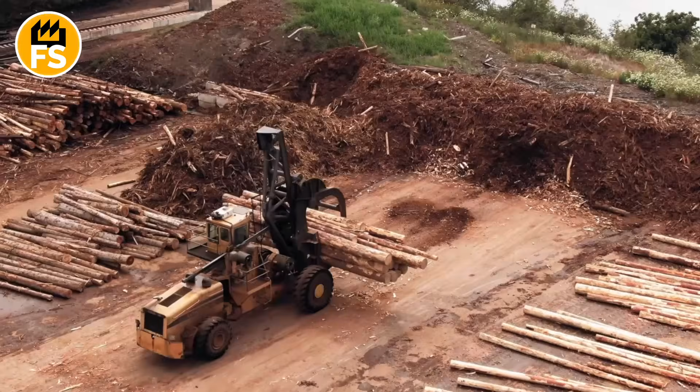Imagine this. The box you threw away yesterday could be back in the store tomorrow, just in a different form. How does an old pizza box turn into a sturdy new box for a smartphone? The secret lies in giant machines that work like steel beasts. They tear cardboard into fibers, cook it in vats the size of a swimming pool, and at temperatures over 350 degrees Fahrenheit, transform it into a wavy, three-dimensional sheet.

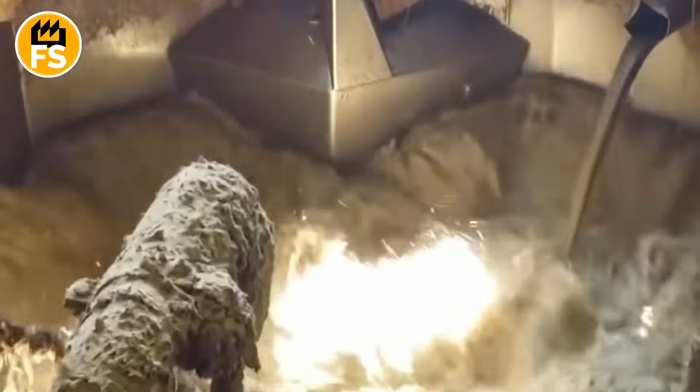It's an endless cycle, from the trash can to the factory and back to the store shelves. But there's a detail that almost no one guesses, and you'll only find it out at the end of this video. The main ingredient for producing cardboard is, of course, wood fiber or cellulose. But the main trick is that today, the vast majority of this fiber is secondary. The main source of raw material for new boxes is old cardboard boxes.

Imagine this endless cycle. When you throw away a box from a pizza or a new TV into a special container, its journey doesn't end. It's just beginning. Millions of such boxes are collected across the country and taken to paper recycling plants. There, they are dumped into a huge vat called a hydropulper. This is essentially a giant kitchen blender the size of a swimming pool, filled with hot water.

Huge blades mix this mass, and the cardboard, soaking, breaks down into individual cellulose fibers, turning into a thick, gray-brown slurry called pulp. During this process, all foreign impurities are removed from the pulp: plastic tape, metal staples, glue residues. Then this mass is thoroughly washed and cleaned to obtain a clean cellulose fiber, ready for a new life. This is the heart of our future cardboard.

But secondary fiber cannot live forever. With each recycling cycle, the cellulose fibers become a little shorter and weaker. Imagine you're copying a copy. With each time, the quality drops a little. To maintain strength, fresh blood, primary cellulose fiber, must be added to this recycled mass. And this is where we finally get to the forest. But these are not the ancient forests we see in movies.

The raw material for primary cellulose is usually either waste from sawmills, such as wood chips and sawdust left after board production, or fast-growing tree species, like pine, which are grown on special, managed forest farms. This is similar to growing corn. Trees are planted, they grow quickly, they are cut down, and new ones are immediately planted in their place.

This wood is also turned into chips, cooked in chemicals to dissolve the natural glue, and turned into a pure cellulose mass. And so, at the paper mill, these two streams, a huge river of recycled fiber and a smaller stream of fresh, are mixed in ideal proportions. This liquid pulp is then poured onto a huge screen, where water is squeezed out of it, and it turns into an endless ribbon of paper, which is then wound into those same giant rolls, ready to become new boxes.

At the paper factory, it all starts with 3 giant rolls of paper, each weighing several tons. 2 rolls are flat liner paper, and 1 is paper for the wavy layer. A giant, dense roll of brown paper, called medium. Its edge is fed into a true steel beast, which is the heart of the entire corrugator. This is the corrugating press.

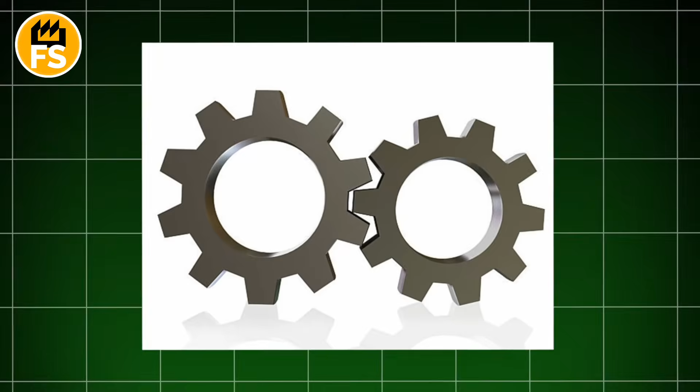The main actors here are 2 huge, massive cylinders of hardened steel, installed one above the other. Their surface is covered with perfectly machined, gear-like grooves, or flutes. The teeth on one roll fit perfectly into the depressions on the other, like 2 perfectly matched gears. And these rolls don't just rotate. They are heated from the inside with steam to a temperature of about 350 degrees Fahrenheit.

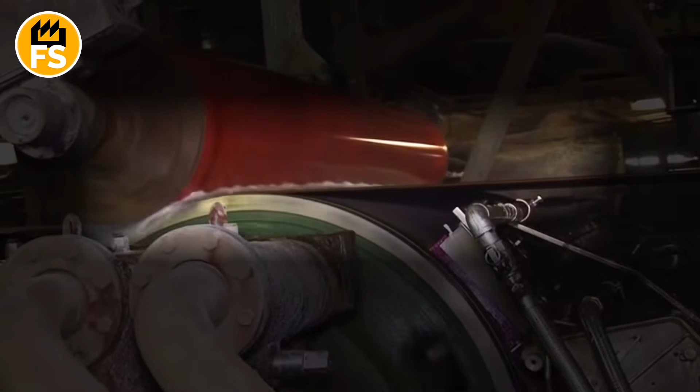Before the paper enters these fiery embraces, it is passed through a system of sprayers that douse it with hot steam. This is done to slightly moisten and soften the wood fibers in the paper, making it more plastic and pliable. It's like warming up clay in your hands before you start sculpting. The prepared, slightly moist and warm paper is drawn at a frantic speed between these 2 hot-toothed rolls. With a deep, powerful hum and the hiss of steam, the machine does its job.

The teeth of one roll press the paper with incredible force into the depressions of the other. At this moment, under the influence of pressure and heat, the paper fibers don't just bend. They change their structure, forever remembering their new, wavy shape. This happens in a fraction of a second. What flew into the machine as a flat, characterless sheet, on the other side, flies out as a perfect, resilient, three-dimensional wave.

Immediately after the paper flies out of the hot embraces of the corrugating rolls, it, already in the shape of a perfect wave, continues its movement. Without losing a second, it passes under a glue unit. This is a high-precision device where a special roll, called an applicator, rotates in a tank of glue. This glue is not just any glue.

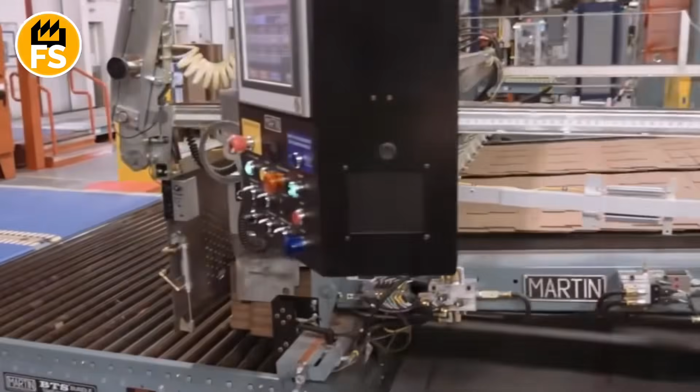This is a specially prepared mixture based on cornstarch, which is activated by heat. The applicator roll has a perfectly smooth surface and applies a thin, barely noticeable layer of glue only to the very tops of the newly created waves.

At this very moment, from another giant roll located above, a flat liner paper is fed. It descends onto the glue-coated waves, and this whole two-layer structure is immediately clamped between the corrugating roll and another, smooth pressing roll. The heat and pressure instantly bake the glue, and a single-sided corrugated cardboard is born. Essentially, a flexible sheet with one flat side and one wavy side.

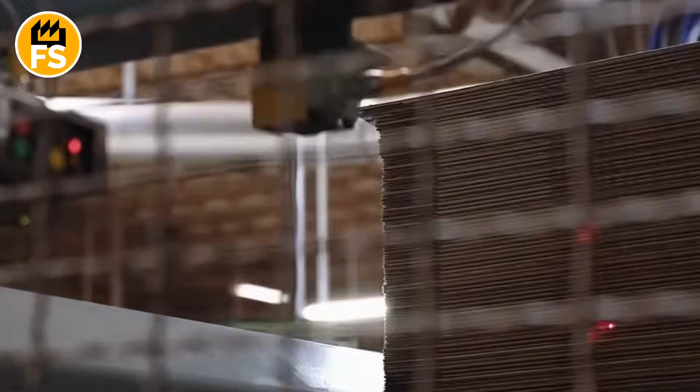This semi-finished product on a long inclined conveyor, called a bridge, rises up where it accumulates, creating a buffer that allows the first and second halves of the machine to work at slightly different speeds. Next, this single-sided corrugated cardboard descends, and the process repeats. Another glue unit applies glue to the open tops of the waves, and from a third giant roll from above, a second flat layer of liner paper is fed. Now our three-layer pie is fully assembled, but the glue in the second seam is still wet.

It enters the longest part of the corrugator, the drying section, or double backer. This is a long, sometimes over 100 feet, horizontal tunnel consisting of a series of flat, steam-heated steel plates. On top of our cardboard sandwich presses a heavy moving belt, pressing it against the hot plates.

Under the influence of heat and pressure, the starch-based glue undergoes a process called gelatinization. It swells and turns into an incredibly strong gel, permanently gluing all three layers into a single, rigid and resilient sheet. At the exit of this long machine, we have an endless, perfectly flat sheet of corrugated cardboard.

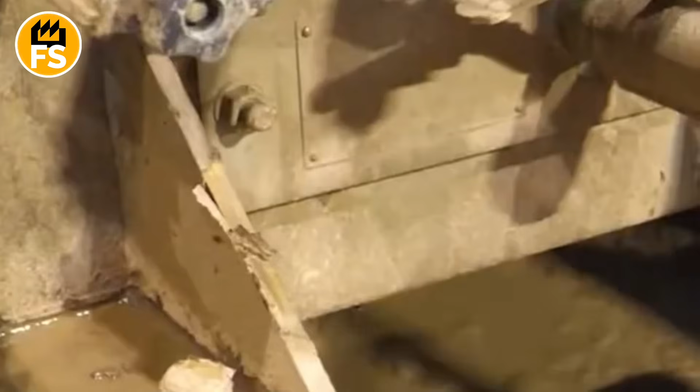This sheet first passes through a slitter-scorer machine. Here, disc knives cut it lengthwise into several strips of the required width. For example, from one wide sheet, 3 narrower blanks for boxes are made, and special dull wheels, scorers, press lines of future folds on it.

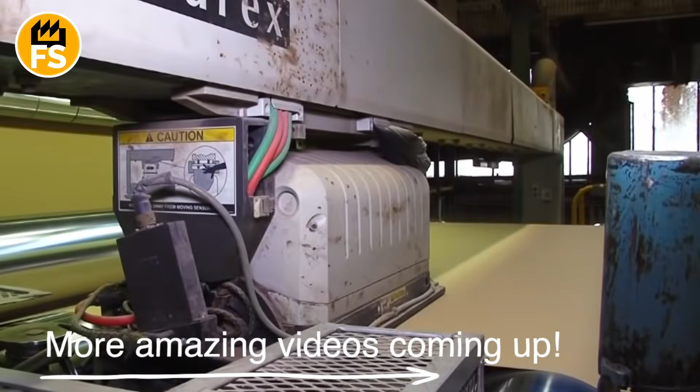Immediately after this, a flying knife works, a giant blade that moves in sync with the speed of the cardboard and chops it crosswise into large rectangular blanks. These blanks are automatically stacked into high, even piles. Next, these piles are sent to a converter line, for example, to a flexo-folder gluer machine.

Here, the blank first passes through a printing section, where rubber clichés apply logos and text. Then it goes under a slotter, a set of knives that cut out grooves that separate the future flaps of the box. Immediately after this, the machine folds the blank along the central line and applies a strip of cold glue to a special side flap. The final rollers press this seam, and a finished but flat, folded box flies out of the machine. This final touch, gluing or sometimes stitching the side seam, completes the process.

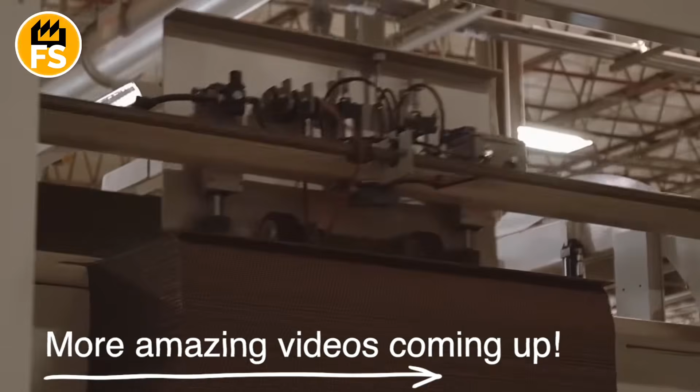The finished flat boxes are collected, automatically counted, and stacked into bundles, which are then tied with a strap and ready to be sent to the warehouse, where they will wait to become a home for any product in the world.

Every year, over 25 billion square feet of oriented strand board are produced worldwide. Imagine, this amount would be enough to cover the entire state of Delaware. Twice. Or to build a path around the Earth over 190 times. Plywood was once the king of the market, but the 80s changed everything. And today, OSB controls over 75% of American construction.

But how is a material that changed the industry forever born from young trees, through hot baths, giant graters, and infernal presses? Watch closely. At the end, you'll learn a secret that even builders keep quiet about.

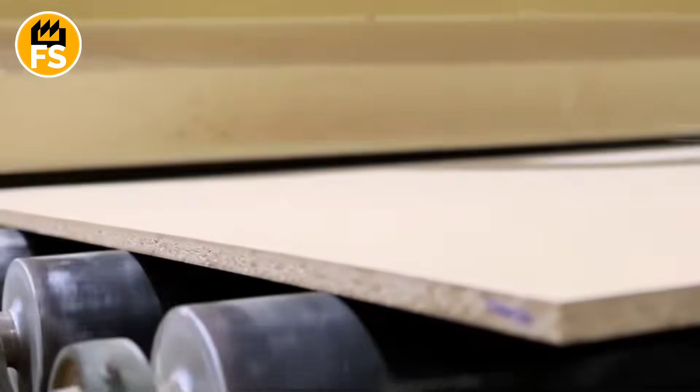It all begins not in a waste warehouse, but in the forest. For the production of high-quality oriented strand board, preference is given not to random offcuts, but to whole logs, usually from relatively young, fast-growing trees like aspen or southern yellow pine. These forests are often managed and self-sustaining, which makes the process more environmentally friendly.

When the logs, tens of feet long, arrive at the factory, they are not immediately sent to the workshop. First, a hot bath awaits them. They are immersed in long pools of hot water, or placed in chambers where they are treated with steam. This isn't just washing. This process, which lasts several hours, softens the wood, and most importantly, weakens the bond between the wood and the bark.

After this sauna, the logs go to a debarking machine. Imagine a huge rotating drum with protrusions inside. The logs rub against each other and against the walls of the drum, and the bark flies off them like a husk.

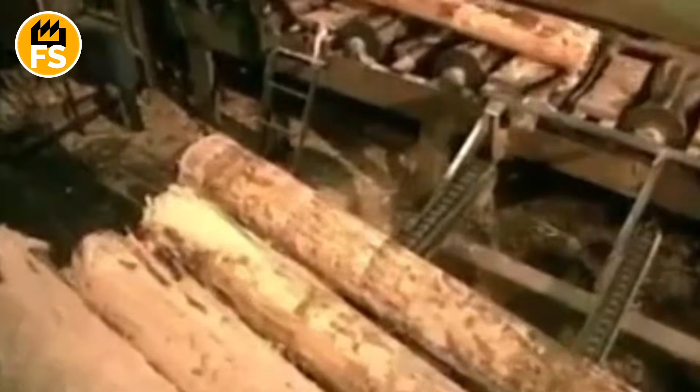Bark removal is a critically important step, as bark lacks strength and does not glue well, so it is an undesirable impurity in the final product.

Annually, factories in North America produce over 25 billion square feet of oriented strand board. This number is so absurd that it's hard to comprehend. Let's try. If you took all this quantity of panels and laid them out, you could completely cover the entire territory of the state of Delaware. Twice. Or build a continuous 1-foot wide path that would wrap around the Earth at the equator over 190 times. This is not just a lot, it's total domination.

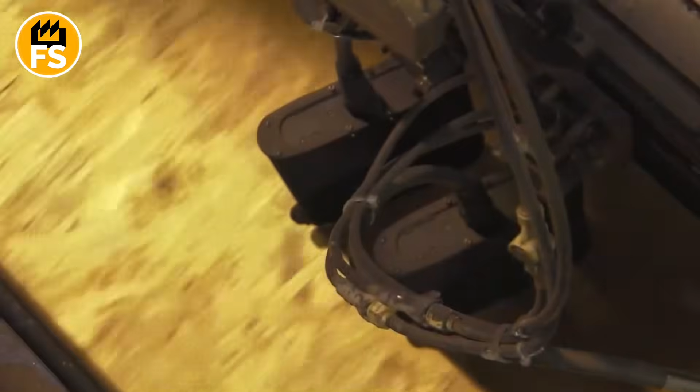For decades, plywood was the king of the market. But in the 80s and 90s, this daring newcomer came onto the scene, and today oriented strand board controls over 75% of the sheathing market for walls and roofs in residential construction in the United States. This was a real quiet revolution.

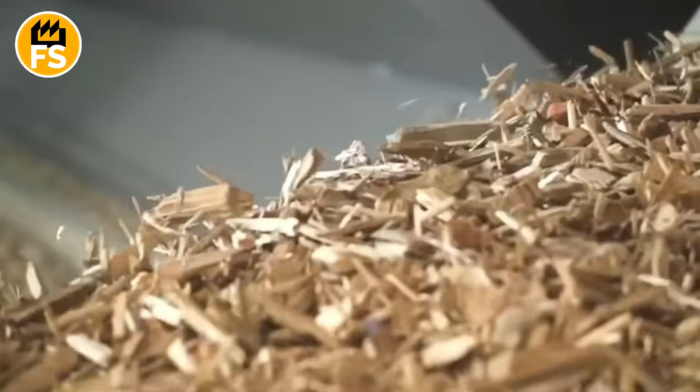The cleaned, light, and still damp trunks are ready for the main event, transformation into thousands of thin ribbons. They go to a machine called a strander, or a flaker. This is the heart of the whole process. Imagine a giant metal disc rotating at a frantic speed, equipped with dozens of sharp, scalpel-like knives. The log is slowly fed to this disc, and it shaves off long, flat, chip-like ribbons, strands.

This is not chaotic shavings. Each strand has parameters precisely set by engineers. The length can reach 6 inches, the width, about an inch, and the thickness, only a few hundredths of an inch. It is this geometry, this noodle shape, that is the key to the future strength of the oriented strand board panel.

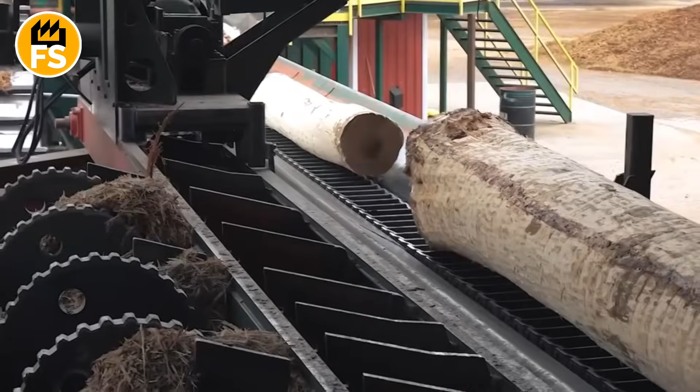When ordinary boards are made from a log, a significant part of it, up to 50%, turns into sawdust, offcuts, and shavings. And in the production of oriented strand board, from 85 to 95% of the entire wood of the log is used. We will talk about this later, but practically nothing goes to waste. The strands are cut from the entire length, and the bark, sawdust, and the smallest particles are burned in furnaces to provide energy for the factory itself. This makes this material not only cheaper, but also much more environmentally responsible.

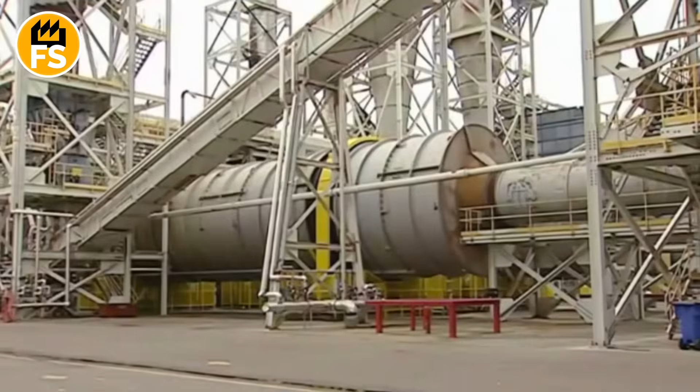The resulting mass of wet, fresh chips, resembling a huge pile of light noodles, is stored in special bunkers, and from there, it is sent for drying. This is a huge, multi-story drum, slowly rotating, half a football field long. Inside it, a high temperature is maintained, and while the strands are slowly tumbling, moving from one end to the other, a stream of hot air evaporates the excess moisture from them. The moisture needs to be reduced from 50 or 70% to only 2 or 3%. This is absolutely necessary so that the resin can properly soak the wood and glue it firmly.

After drying, the strands pass through a system of huge vibrating screens, which sift out particles that are too small, for example dust, which will go to fuel for the same dryer, and pieces that are too large, which will be sent for regrinding. Now the perfectly dry and sorted strands are ready for impregnation.

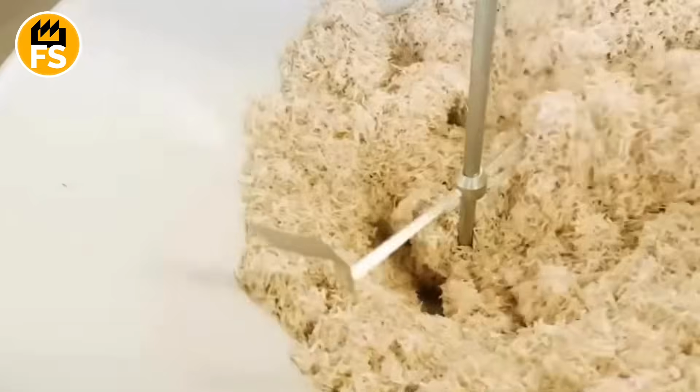They enter a huge, slowly rotating drum mixer. While they are being mixed, a sticky chemical cocktail is sprayed onto them through special nozzles. The main ingredient is a waterproof resin, which will be our glue. The second important component is paraffin wax. It envelops each chip like an invisible raincoat, and it is this that will give the future oriented strand board panel its famous moisture resistance.

And now, the smartest and most important part of the process begins, which gave the material its name, orientation. The strands, impregnated with glue and wax, go to a long, wide forming conveyor. Here, a whole system of mechanical choreographers works. Special discs, rollers, and combs that lay out the chips in a precisely defined order.

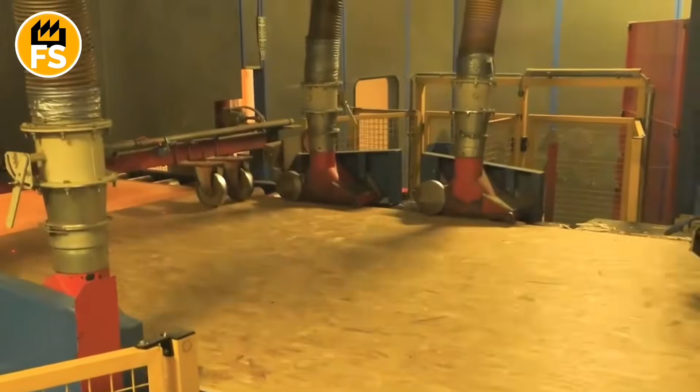First, the bottom layer is formed. The choreographers lay out the strands so that they all lie parallel to the long edge of the future panel, that is, lengthwise. Then comes the turn of the middle layer. Here the strands are laid out perpendicularly, that is, crosswise. And finally, the top layer is again laid out lengthwise.

As a result, we get a thick, fluffy, 3-layer pie, where the fibers in each layer are perpendicular to the fibers in the adjacent one. It is this cross structure, which imitates the strength of plywood, that is the secret that makes oriented strand board incredibly strong in bending and resistant to deformation.

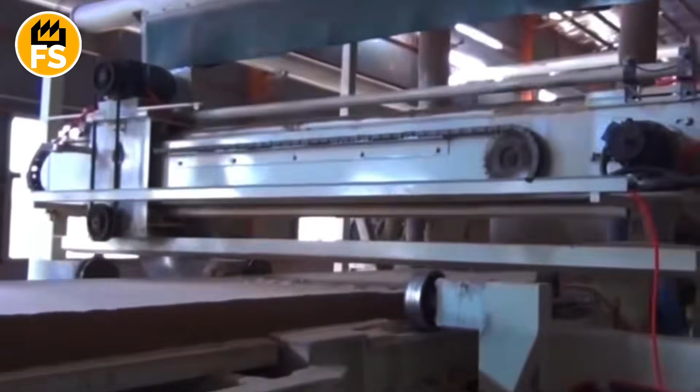This fluffy mat, which can be several feet thick, slowly moves to the final test, the hot press. This is a real industrial leviathan, a multi-story structure that creates colossal pressure and heat. The mat enters inside, and massive steel plates begin to compress it with a force of hundreds of pounds per square inch. At the same time, the press is heated to a temperature of 400 degrees Fahrenheit.

This heat activates the resin, causing it to polymerize and permanently glue all the chips into a single monolithic shield. The wax also melts, even better impregnating the wood and filling microscopic voids. In a few minutes, the loose mass turns into a hard, incredibly dense, and hot panel. A huge master sheet comes out of the press, which can be 50 feet long and 12 feet wide.

While it is still warm, its edges are trimmed with diamond saws, and then giant saws cut it into standard building formats, most often 4 by 8 feet. Markings with information about its thickness, class, and compliance with building codes are applied to the surface of the panel. Sometimes special tongues and grooves are cut into the edges so that the sheets fit together perfectly when installing a

floor or roof. The finished, perfectly rectangular sheets are stacked in high piles by robotic manipulators, wrapped in protective film, and sent to the warehouse. And so, having passed the path from a whole log through a giant grater, a sticky shower, and the fiery embrace of a press, this honest, unpretentious, and insanely strong material is born, ready to become the silent but reliable foundation for thousands of homes across the country.

For the construction of an average single-family home with an area of 2,400 square feet, approximately 8,000 square feet of oriented strand board panels are needed. This material goes into everything. They sheathe the exterior walls, creating a strong and rigid frame. They make a solid sheathing on the roof, on which shingles are then laid. And of course, they make the subfloor, which is the foundation for all rooms. In essence, the entire modern American house is a wooden frame wrapped in a strong cocoon of oriented strand board.

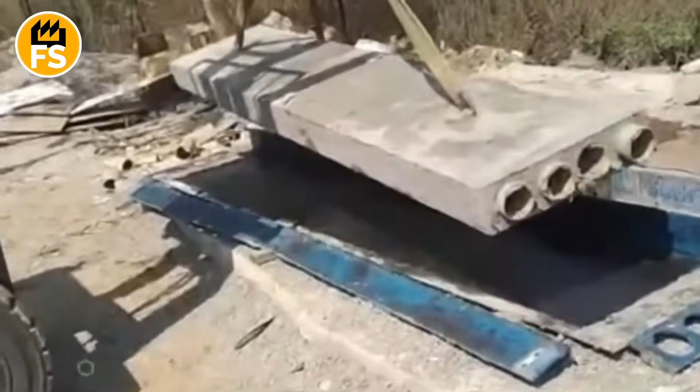Every year, hundreds of millions of square feet of hollow core slabs are born worldwide. That's an area large enough to build 30 Pentagons. Imagine a factory where a machine crawls along a 600-foot track, slowly creating a concrete ribbon half a mile long in a single shift. And now for the main point. These slabs are a whole 2,000 tons lighter for a building with an area of 100,000 square feet. That's minus 500 elephants on the construction's weight scale.

In a single 10-hour shift, one such bed can spit out almost half a mile of perfectly formed concrete slab. And at a large factory, there can be several such beds. This isn't just construction. It's an assembly line working at a speed unimaginable for traditional on-site concrete casting.

And now for the main feature, the hollow cores. These holes inside are not just for aesthetics. They reduce the weight of the slab by almost 50% compared to a solid slab of the same thickness and strength. What does this give us? Here's what. Imagine the construction of an office center with an area of 100,000 square feet. If the floors were made of ordinary solid concrete, their weight would be approximately 5,000 tons.

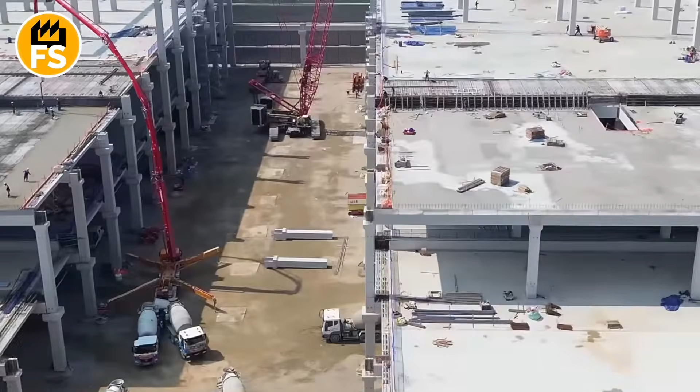But with hollow core slabs, only 3,000 tons. We just threw out 2,000 tons of excess weight from the building. That's the weight of about 500 adult elephants, which now doesn't need to be supported by the foundations, columns, and beams. This allows for making the entire structure of the building lighter, more elegant, and most importantly, much cheaper.

But how can such a light slab be strong? The secret is in those tensioned steel muscles. The concrete used in these slabs is not the same as on your sidewalk. This is high-strength concrete that can withstand a pressure of over 8,000 pounds per square inch, while ordinary concrete is only 3,000 or 4,000. And the steel strands inside it are tensioned with such force that they create a constant compressive force in the slab.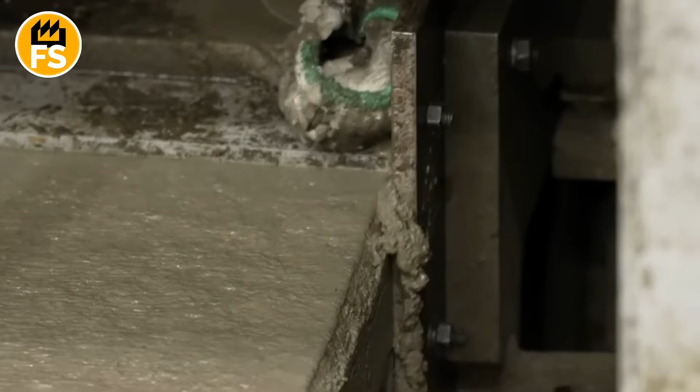Thanks to this, a hollow core slab can easily span a length of 60 feet without any intermediate support. 60 feet is the width of a professional basketball court. Imagine a huge open space without a single column. That's why these slabs are beloved for the construction of parking garages, supermarkets, and open-plan offices.

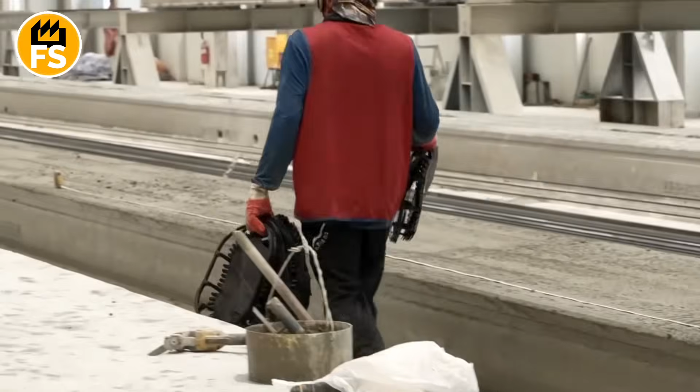Annually in North America, over 200 million square feet of hollow core slabs are produced. This number is simply mind-boggling. This is an area large enough to build 30 giant buildings like the Pentagon. Every year. This isn't just a building material. This is a whole industry built on speed, efficiency, and the smart use of resources. So these figures are not just dry data. They are proof that sometimes, to become stronger, you just need to get rid of the excess inside.

It all begins not in a concrete mixer, but on a giant, perfectly flat airfield inside the workshop. This is a forming bed. Imagine a perfectly smooth, polished steel track several feet wide, but with a length of 400, 500, and sometimes even 600 feet. This is longer than 2 football fields laid end to end.

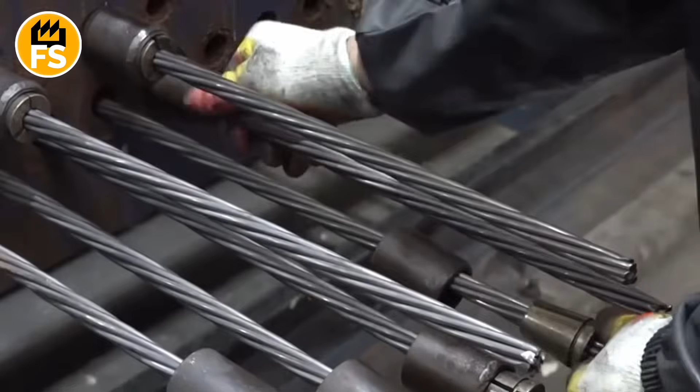Under this track, pipes are laid, through which hot water or steam circulates to keep it warm. This is our ideal bed for the birth of the future giant. At both ends of this track are massive steel anchors, embedded in a thick concrete foundation. They look like steel teeth that have bitten into the ground, and their task is to withstand simply inhuman loads.

Between these two anchors, high-strength steel strands are stretched. This is not ordinary wire. It's several steel threads woven together, each of which can withstand the weight of a car. They are laid along the entire length of the 600-foot bed, forming the future skeleton of the slab. One end of each strand is securely fixed in the anchor, and, to the other, a giant hydraulic jack is connected. And this jack begins to pull.

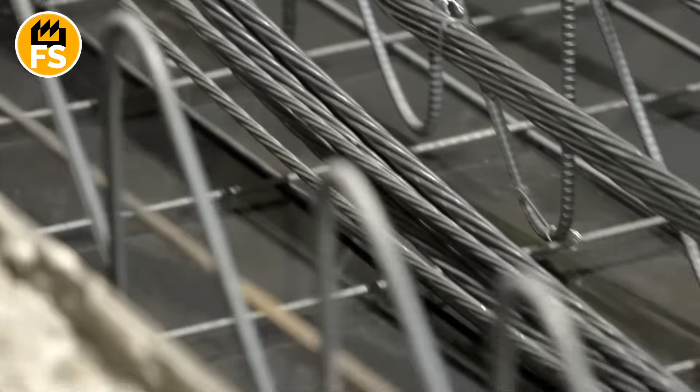It tensions each of these steel strands with a force of 30 or 40,000 pounds. It's like hanging 3 full-size pickup trucks on each thin thread. The steel muscles tense up, becoming as hard as the strings of a giant guitar, and store colossal energy within them. This is secret number 1. Pre-stressing. When the steel skeleton is tensed and ringing from the tension, the main hero comes on stage.

The forming machine, or slip former. This is one of the most amazing machines in the world of construction. Imagine a strange, low-slung, self-propelled creature that slowly crawls on rails along our long bed. On top of it is a large hopper where concrete is loaded.

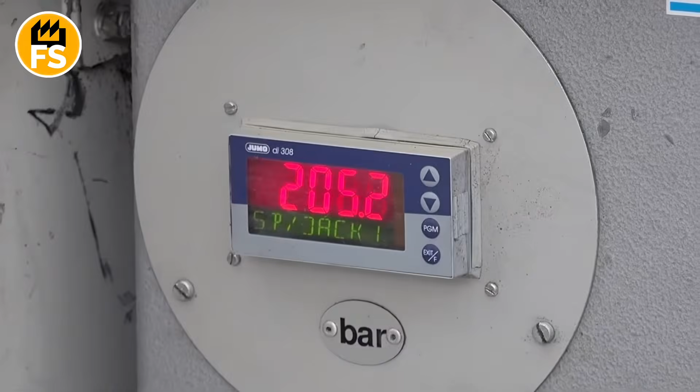But this is not ordinary liquid concrete. This is so-called zero-slump concrete. It is so dry that it resembles damp earth. If you took it in your hands, it would not flow. And so this machine begins its slow journey. Inside it, a real miracle happens. First, the concrete from the hopper is fed down and surrounds our tensioned steel strands. Second, special vibrators and compactors with incredible force tamp this dry mixture, making it incredibly dense.

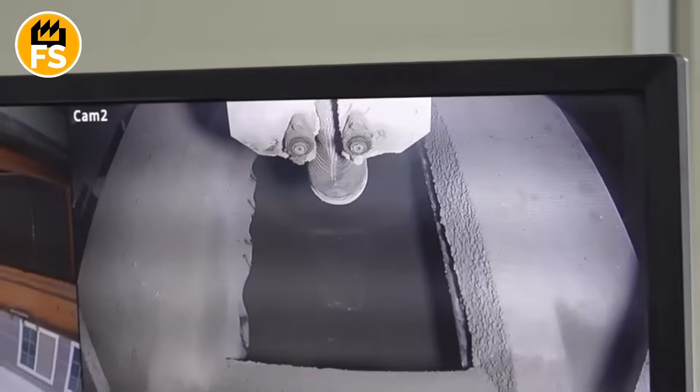And third, most importantly, inside the machine are special forming tubes, or mandrels, which, vibrating, pass through the thickness of the concrete, leaving behind perfectly round, smooth, hollow cores. The machine, like a giant concrete snail, slowly crawls forward, and behind it, like a trail, remains a perfectly formed, endless concrete slab, with hollow cores inside and tensioned steel muscles hidden in its body. Because the concrete is so dry, it instantly holds its shape and does not spread.

This is secret number 2. The hollow cores that make the slab 50% lighter than a solid one, while barely reducing its strength, because the main work is done by the top and bottom flanges. When the machine reaches the end of the 600-foot bed, its work is done. But our slab is still green and weak. It's time for a spa procedure.

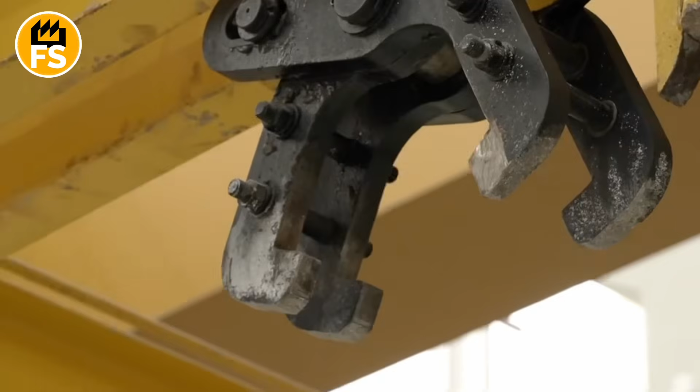Workers cover the entire length of this concrete ribbon with huge insulating tarps, similar to blankets. Hot steam is fed under these blankets. This creates a sauna effect that sharply accelerates the chemical reaction of concrete hardening. Under normal conditions, concrete needs weeks to gain full strength, and in this hot, humid atmosphere, it reaches the required strength, over 5,000 pounds per square inch, in just 12 or 24 hours.

When the concrete has hardened and become as strong as stone, the moment of release comes. Workers slowly release the tension on the hydraulic jacks. The tensioned steel strands, which are now firmly bonded to the concrete, try to contract to their original length, but the concrete does not let them do so. As a result, this huge compressive force is transferred to the concrete slab itself.

Now, it is not just concrete, it is pre-stressed or compressed. This means that when a load is applied to it from above, trying to bend it, it will first have to overcome this built-in compressive force. This is what allows it to span huge distances without additional supports, and the final act of this spectacle is cutting. Along our long concrete ribbon, a giant saw moves on rails.

This is a monster with a huge disc coated with industrial diamonds. With a deafening roar and a fountain of sparks and water that cools the disc, this saw with incredible precision cuts the slab into pieces of the required length, according to the order. The finished, perfectly even, light, and incredibly strong slabs are picked up by giant cranes and loaded onto trucks.

And so, having passed the path from a tensioned steel string to the slow crawl of a concrete snail and the final diamond cut, this brilliant work of engineering is born, ready to become a fast, effective, and reliable floor in the buildings where we live, work, and play.

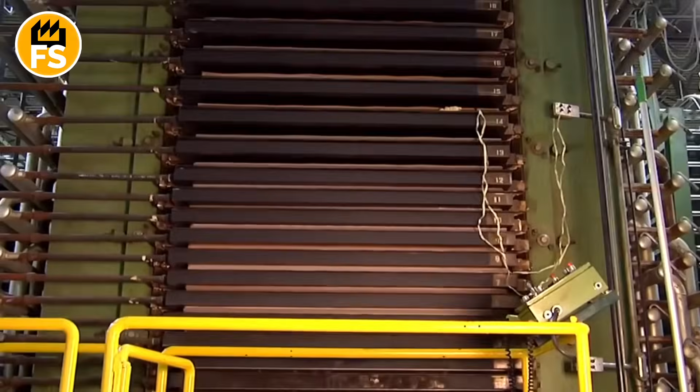Every year, over 1 billion square feet of laminate flooring are sold worldwide. We see this covering every day at home, in offices, and even in shopping malls. But few people realize the complex engineering hidden in each plank. Imagine, under a pressure of over 1,000 pounds and at a temperature higher than 400 degrees Fahrenheit, thin layers of paper and resin are transformed into an ultra-durable surface that challenges stone itself.

The laminate market is valued at tens of billions of dollars, but behind these numbers is a process that is impressive in its scale and precision. Watch until the end, and you'll discover the secret that your floor is hiding.

Laminate, which has become an extremely popular choice for flooring, combines aesthetics, durability, and cost-effectiveness. Its production begins with the careful selection of raw materials and ends with the creation of finished panels, ready for installation. For the manufacture of laminate, 4 main components are used: the substrate, a stabilizing layer, decorative paper, and a protective layer. Each of these elements plays a key role in the formation of the final product.

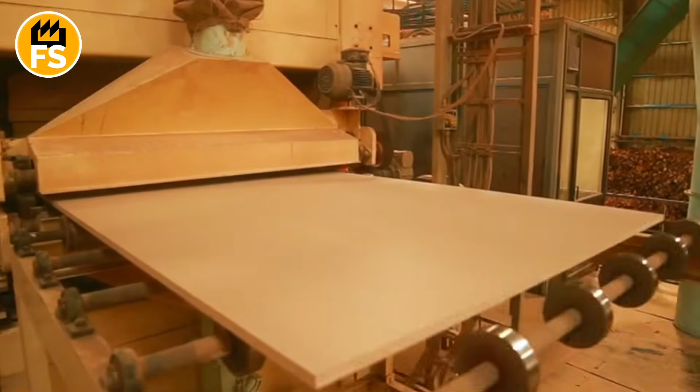The process begins with the preparation of the core, or the base of the laminate, which is the most important part that provides its strength and stability. This core is made from high-density fiberboard, known as HDF. The production of HDF begins with sawing wood, mainly coniferous species, into small chips. These chips then undergo a steaming and cleaning process to remove foreign impurities. After this, the wood is transformed into fibers using special mills. The resulting fibers are mixed with glue, most often based on synthetic resins, and formed into a thick, soft mat.

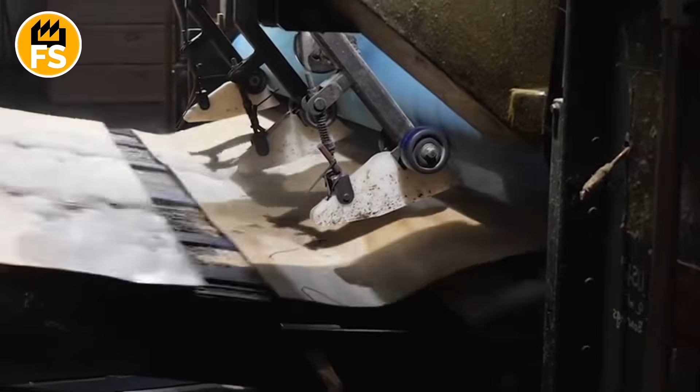Next, this mat undergoes hot pressing under a pressure of about 700 pounds per square inch at a temperature of 400 degrees Fahrenheit. This pressing compacts the fibers, forcing out moisture and air, and creates a strong, uniform HDF board. The thickness of such boards is usually from 1/4 of an inch to 1/2 an inch, depending on the laminate class. The quality of the board directly affects the moisture resistance of the finished laminate, its bending strength, and overall durability. The next important stage is the preparation of the decorative and protective layers.

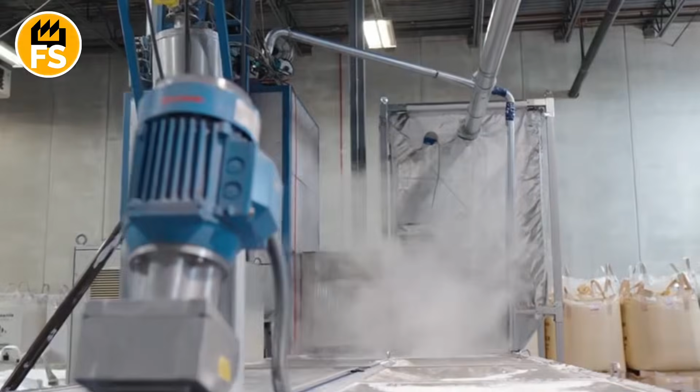The decorative layer is a special paper on which a printed pattern is applied, imitating wood, stone, or another material. This paper is impregnated with melamine resin, which, after polymerization, gives it hardness and wear resistance. The protective or overlay layer is also paper, but it is impregnated with an even greater amount of melamine resin and small particles of aluminum oxide. Aluminum oxide, which is a very hard material, gives the laminate its main property: resistance to abrasion and scratches. The thickness of the protective layer is only a few thousandths of an inch, but it performs a critical function. Both of these impregnated paper layers are dried and stored in rolls until the pressing moment.

The third layer, the stabilizing or balancing layer, is placed on the lower side of the base. This layer also consists of paper, impregnated with resin, and serves to prevent the board from warping. Without this layer, during use, the difference in pressure and humidity between the upper and lower layers of the laminate could lead to the panel bending. The stabilizing layer helps to maintain the geometric stability of the board.

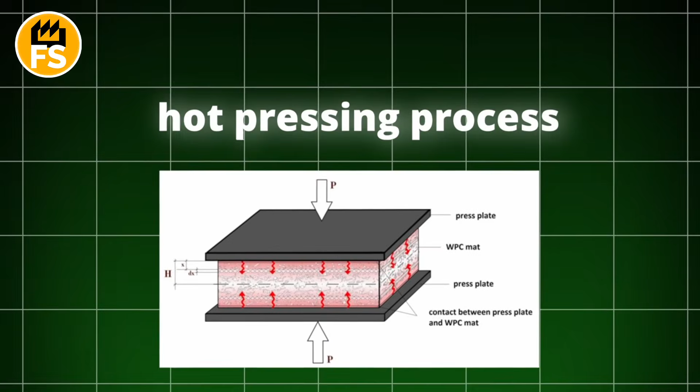The key moment in the production of laminate is the hot pressing process, which combines all 4 components into a single monolithic panel. This takes place on multi-layer presses, where the prepared sheets are assembled into a sandwich. First the stabilizing layer, then the core. After that the decorative layer, and on top, the protective overlay.

This multi-layer structure is placed in a press where, under the influence of high temperature, which can reach 420 degrees Fahrenheit, and a pressure of 1,200 pounds per square inch, the melamine resins melt and harden, securely bonding all the layers together. This process takes from 30 to 40 seconds and is called lamination. During pressing, the surface texture is also formed, which can imitate the texture of wood. After pressing, the laminate sheets are cooled and stabilized, which is important to prevent deformation.

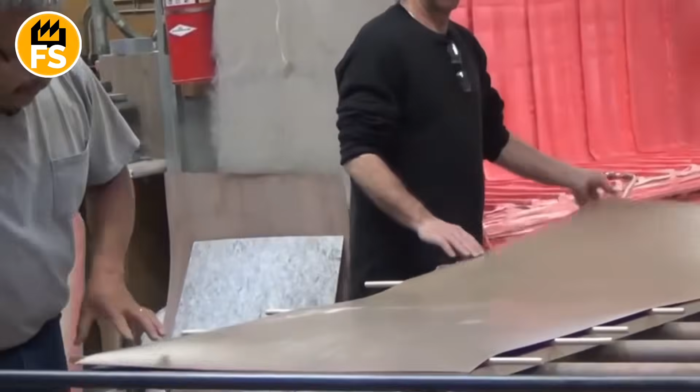When the panels have cooled, they are sent for trimming and milling. At this stage, the large sheets of laminate, which can be 8 feet by 4 feet in size, are cut into smaller, standard-sized panels. For example, 48 inches by 6 inches. After trimming, locking joints, known as a click system, are milled on the side edges of each panel. This is a key feature of modern laminate, which allows it to be laid without using glue. The milling process must be extremely precise to ensure a perfect connection between the panels. Tolerances are only a few thousandths of an inch.

The final stages of production include quality control and packaging. Each batch of laminate is tested for abrasion resistance, impact resistance, moisture resistance, and other parameters. The abrasion resistance test, known as the Taber test, determines the wear class of the laminate. A high class means that the laminate will withstand a greater number of abrasion cycles.

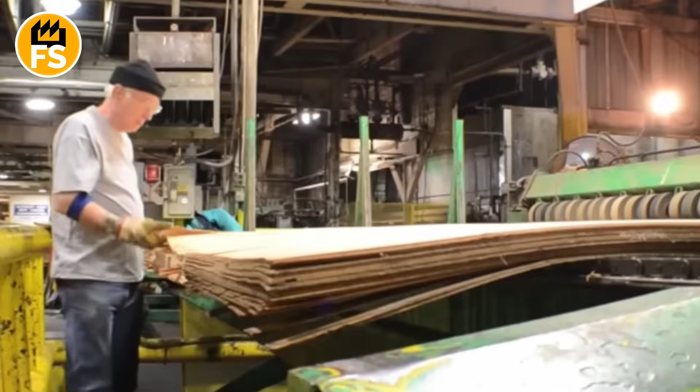After successfully passing all tests, the panels are sorted, packed in sturdy cardboard boxes, and prepared for shipment. The weight of one box can be 40 pounds. All these processes, from the transformation of wood into fibers to the packaging of finished panels, are part of a highly automated and technologically complex production cycle.

The result is a laminate that not only has an attractive appearance, but also high performance characteristics, which makes it one of the most popular flooring options in the United States and around the world. The total length of a production line can reach hundreds of feet, and the production speed is measured in thousands of square feet per hour. Understanding these processes helps to appreciate the complexity and engineering excellence of the product that we see every day in homes, offices, and commercial spaces.

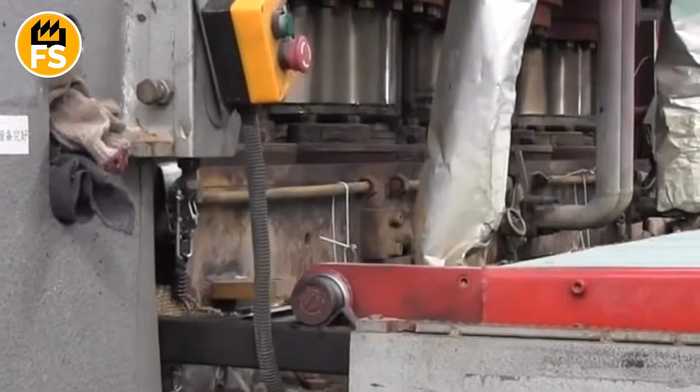The global laminate flooring market has shown stable growth in recent years, driven by its popularity as an affordable, durable, and aesthetically attractive covering. According to expert estimates, it is projected that by 2030, this figure will grow to $35 billion, demonstrating an average annual growth rate of about 4%. The main driving factors are the construction boom in developing countries and the growing popularity of do-it-yourself repairs in developed countries.

The geography of production and consumption. The largest regions for laminate production and consumption are the Asia-Pacific region and North America. In the United States alone, the annual production of laminate reaches billions of square feet. Europe also remains a significant player in the market, but the growth rates there are somewhat slower. Approximately 40% of the global demand for laminate comes from the residential sector, while the remaining 60% is from the commercial and industrial sectors.

A significant amount of wood raw material is used for the production of laminate. Typically, to produce 1 square foot of high-density laminate board, approximately 0.15 cubic feet of wood is required. Given the production volumes, this leads to significant consumption of forest resources, although most manufacturers use recycled wood or waste from the sawmill industry. Standard sizes of laminate planks in North America range from 48 to 60 inches in length and from 5 to 8 inches in width. The weight of one package can be from 35 to 45 pounds, depending on the thickness and density of the material.

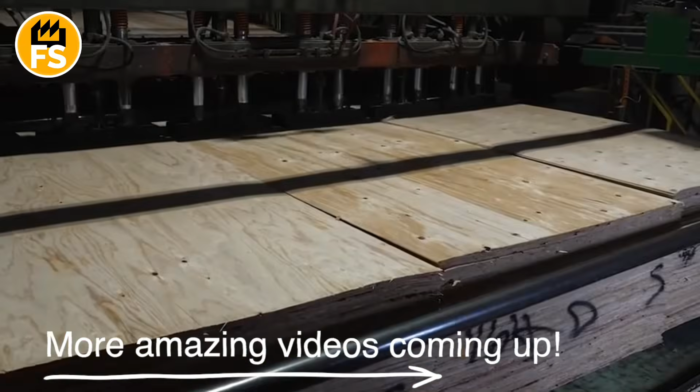In the modern market, there is a growing demand for laminate with a high imitation of natural wood and stone. Over 70% of sales are for decors that imitate wood, with oak and maple shades being the most popular. The demand for water-resistant laminate is also growing, which occupies over 25% of the market and continues to increase its share, especially for use in kitchens and bathrooms. The next time you walk on your laminate floor, remember this epic story. So enjoy your renovated space.

Imagine a toxic gas that was once used as a weapon in war. Today, however, your plastic windows, the medicines in the pharmacy, or even your drinking water wouldn't exist without it. The United States produces over 12 million tons of chlorine each year, a capacity that could turn the ocean into a giant swimming pool in a matter of days. But the real mystery is something else. Only a tiny fraction of this volume is used for disinfection. So where does the rest go? Watch until the end, and you will learn a secret that will turn your idea of this gas upside down.

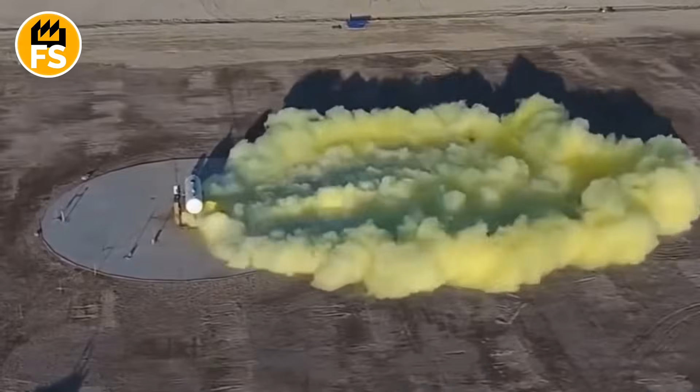The United States is one of the world's largest producers of chlorine. Annually, the country's factories produce over 12 million tons of this gas. This number is simply mind-boggling. Imagine the weight of the aircraft carrier Gerald R. Ford, the heaviest warship in the world. It's about 100,000 tons. This means that in a year, American industry produces as much chlorine as 120 such aircraft carriers weigh. This huge amount makes chlorine one of the 10 most produced chemicals in the country.

It all begins not in a laboratory, but deep underground. The main ingredient for our recipe is ordinary rock salt, or sodium chloride. But it's not brought to the factory in salt shakers. It is either mined in the form of huge blocks, or, much more efficiently, pumped out from under the ground.

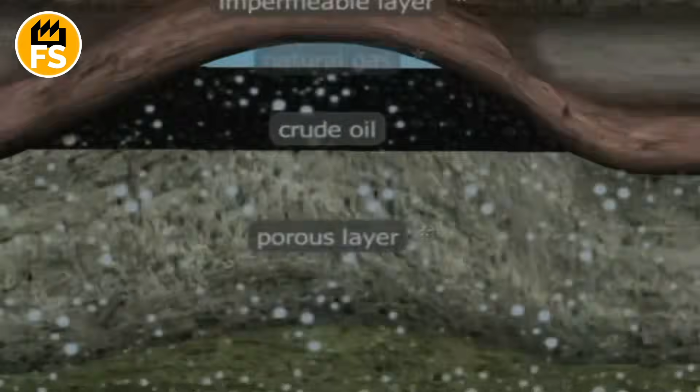Water is pumped into deep underground salt deposits. The water dissolves the salt, forming a saturated salt solution called brine. And it is this concentrated, salty as tears solution that is our raw material. But it's still dirty. It's full of impurities, calcium, magnesium, and other minerals that can clog our expensive equipment.

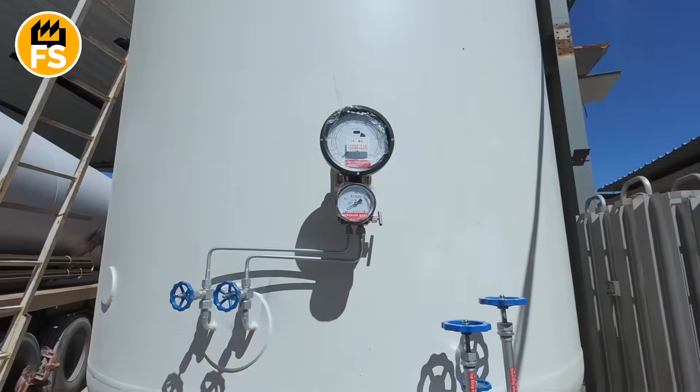So before the main show begins, the brine undergoes a thorough cleaning. It is passed through a whole series of tanks where, with the help of chemicals, all impurities are precipitated and filtered out of it. At the exit, we get a perfectly clean, transparent, and very salty solution, ready for the main event, electrolysis.

Now let's move to the heart of the factory, to the so-called cell room. This is a huge, noisy hall, filled with rows of strange closed tanks connected by a network of pipes and thick electrical cables. These are electrolyzers, or cells. It is here that all the magic, or rather, all the chemistry, will take place.

Let's imagine one such electrolyzer. Essentially, it's a box into which our clean salt solution is poured, and two electrodes are immersed in this solution, a positively charged anode and a negatively charged cathode. And now, a direct electric current of colossal strength is applied to these electrodes. And here the breakdown begins.

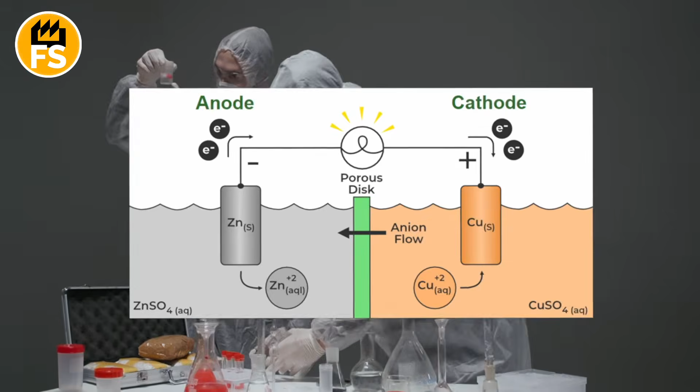The salt molecule in the water breaks down into positively charged sodium ions and negatively charged chloride ions, and the electric field forces them to move. The positive sodium ions are attracted to the negative cathode like a magnet, and the negative chloride ions to the positive anode. And here, at the anode, what it was all for begins.

Each chloride ion that has stuck to the anode gives up its extra electron. Two such chlorine atoms, having lost their charge, immediately unite, forming a molecule of gaseous chlorine. Billions of these molecules gather together, and tiny bubbles of a greenish-yellow gas begin to appear on the surface of the anode. This is our chlorine.

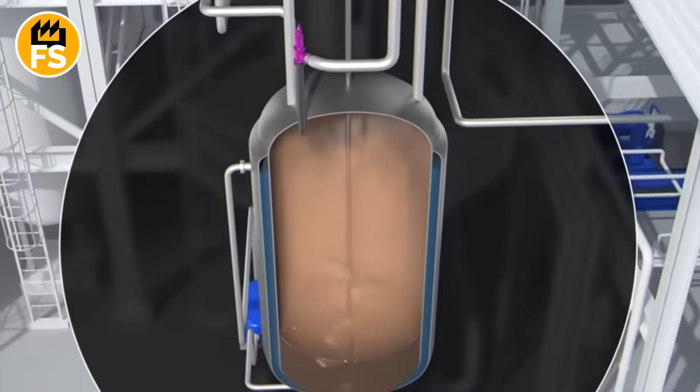The main resource for chlorine production is electricity. The chlor-alkali industry is one of the largest consumers of electricity in the entire US manufacturing sector. To produce 1 ton of chlorine, approximately 2,500 kilowatt hours of electricity are needed. And now let's multiply this by 12 million tons per year.

It turns out that this industry consumes about 30 billion kilowatt hours annually. This is more than the annual electricity consumption of entire states, like Vermont or Wyoming. This is a city of 1 million people, working all year just to break salt molecules.

But what happens at the cathode? The sodium ions have arrived there. But they do not turn into metallic sodium. Instead, the electric current splits the water molecules in the solution into hydrogen and hydroxide ions. Bubbles of pure hydrogen are released at the cathode. This is our first byproduct. And the hydroxide ions remaining in the solution combine with our sodium ions, forming caustic soda. This is our second, incredibly valuable byproduct.

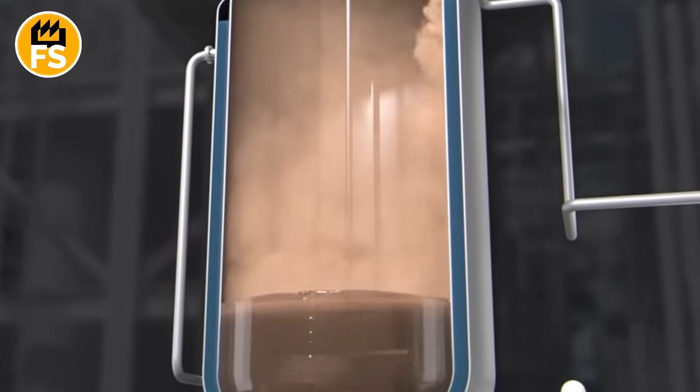But here, a huge problem arises. We have just obtained 3 substances: chlorine, hydrogen, and caustic soda. And they must never be mixed. Chlorine and hydrogen together form an explosive mixture. And chlorine and caustic soda react to form bleach, which we don't need at all. Therefore, the whole genius of the technology lies in separating these 3 products at the moment of their birth.

For this, special membranes or diaphragms are used. Imagine that between the anode and the cathode, there is a thin, paper-like, but very clever partition. This membrane, made of a special polymer, is like a face control at a nightclub. It lets the positive sodium ions pass through to the cathode, but blocks the negative chloride ions, not letting them into the cathode space. Thus, chlorine is born and collected in one part of the cell, and hydrogen and caustic soda in the other.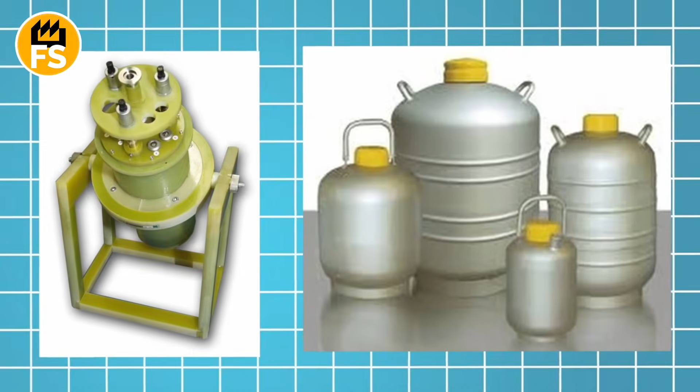Now we need to collect our harvest. From the anode chamber, a wet, hot, greenish-yellow gas is continuously pumped out. First, it needs to be cooled. It is passed through heat exchangers, where it gives up its heat. Then, it needs to be dried. Chlorine is incredibly aggressive, especially when wet. It corrodes almost everything. But there is one substance it doesn't touch: concentrated sulfuric acid.

So the wet chlorine is passed through towers, where it bubbles through sulfuric acid, which, like a sponge, absorbs all the water from it. The resulting dry, cold, but still gaseous chlorine is ready for the next stage: liquefaction. It is compressed under huge pressure and simultaneously cooled. Under this double blow, the gas turns into a transparent, amber-yellow liquid, similar to oil.

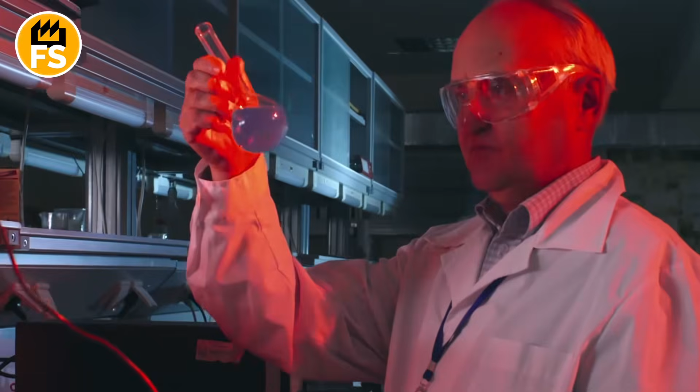This liquid chlorine is much more convenient to transport and store. It is poured into special thick-walled steel tanks or railway cars. Every step of this process takes place in conditions of absolute hermeticity, because a leak of this gas is deadly. And what about our byproducts?

They are no less important. The hydrogen we obtained is collected, purified, and used either as fuel for the plant itself or sold for the production of ammonia or in the food industry. And the resulting caustic soda solution is pumped out, concentrated by evaporating the excess water, and sold. This is one of the most important products in the chemical industry, used for the production of soap, paper, aluminum, and much more.

And so, from simple salt water, by passing a huge amount of electricity through it, people have learned to obtain 3 extremely important substances at once, which are the foundation for thousands of other products that surround us in everyday life. And now, let's see where all this huge amount of chlorine goes.

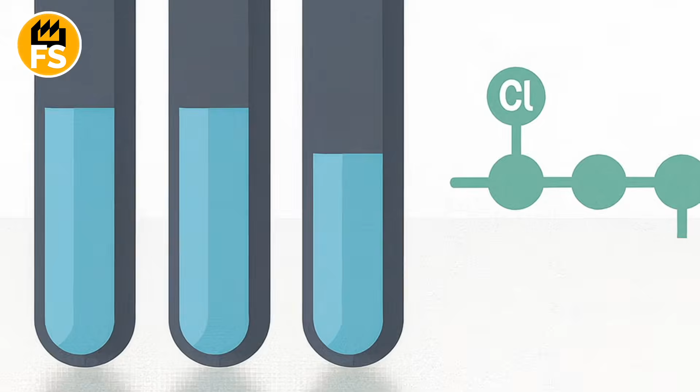You might think it all goes to disinfecting swimming pools, but that's just a drop in the ocean. In fact, less than 5% of all chlorine is used for water disinfection. So, where does the other 95% go? It is a key building block for other products. About 40% of all chlorine goes to the production of this universal plastic.

The vinyl windows in your house, water pipes, medical IVs, vinyl records, the credit card in your wallet, all of this was born thanks to chlorine. Another 40% is used to create thousands of other organic and inorganic compounds. Pharmaceuticals, solvents, refrigerants, herbicides, insecticides. The list is endless. And chlorine is also a key component for bleaching paper, giving it that same pure white color.

And finally, about the byproducts, which are actually no less important. We remember that for every ton of chlorine, we get about 1.1 tons of caustic soda. This means that annually, American industry produces over 13 million tons of this important alkali. This makes chlor-alkali production a perfectly balanced business. When the demand for one product falls, the demand for the other may rise, allowing the plants to operate stably.

So these millions of tons are not just statistics. They are proof that this sharp, suffocating gas is the invisible foundation for a huge part of the American economy, from the plastic pipes under our streets to the medicines in our pharmacies.

Today, we're embarking on a journey to one of the coolest and smartest factories in the world of woodworking. We're going to talk about how people looked at ordinary wooden floors, which fear moisture like a vampire fears garlic, and said, "Dude, we can do better." Thus, engineered hardwood was born.

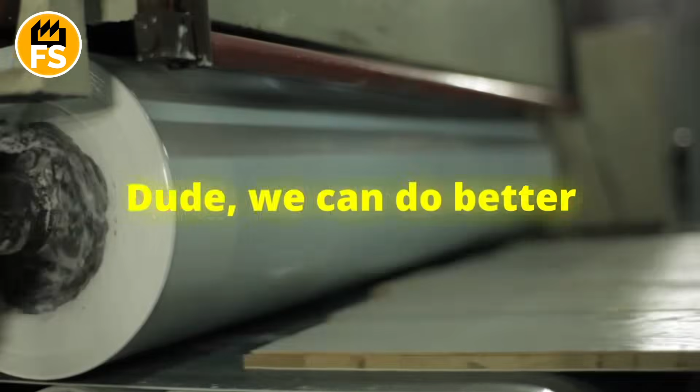This isn't just a board, it's a true wooden club sandwich, a brilliant work of engineering where the beauty of natural wood is combined with superhuman stability. This is the story of how a floor that laughs in the face of humidity fluctuations is born from several different trees, a giant glue juicer, and an infernal ultraviolet tanning session.

It all begins not with one, but with 2 different forests. The first forest is a runway for supermodels. Here grow those noble trees whose beauty makes the heart beat faster. Majestic oak, strong hickory, elegant maple, or luxurious American walnut. For our sandwich, we don't need the whole log. We only need its soul, its most beautiful part, the thin top layer that everyone will see.

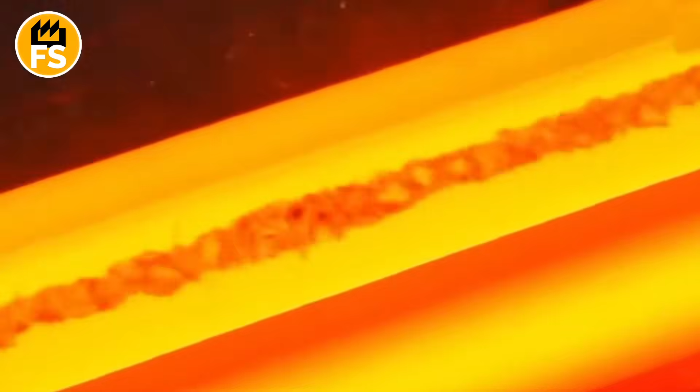Therefore, the best, straightest logs are brought to the factory. First, a real spa day awaits them. They are immersed in huge pools of hot water, or placed in chambers where they are treated with steam at a temperature of 200 degrees Fahrenheit. This is done to soften the wood and make it ready for the thinnest slicing in the world. After this, the log goes to a machine that is something between a giant pencil sharpener and an industrial slicer for delicacies.

This is a peeling or slicing machine. Imagine a sharp, scalpel-like knife 10 feet long. It is slowly brought to the rotating log and begins to shave off a continuous wide ribbon of wood, just 1/8 or even 1/16 of an inch thick. This is our veneer, our precious ham for the sandwich.

This wet, flexible sheet is then carefully dried in special chambers to make it stable, but to preserve its natural beauty. But what will be the bread in our sandwich? For this, we don't need supermodels. We go to another forest where simple workhorses grow. Fast-growing and inexpensive species like poplar, birch, or eucalyptus. These logs go through a similar peeling procedure, but the ribbons are cut a little thicker. And this is where the main secret of the stability of engineered hardwood begins.

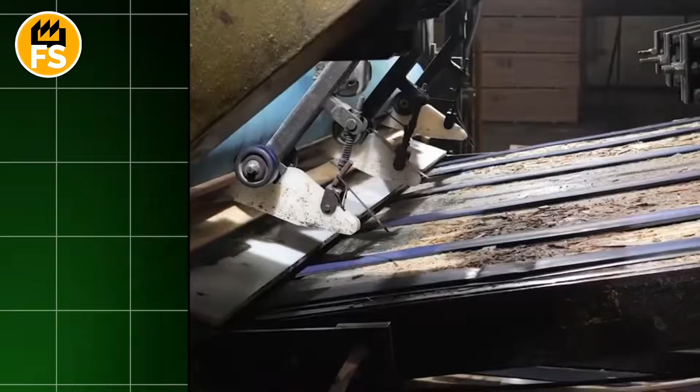Imagine that you took several of these thin wooden sheets. You lay the first one so that the fibers run lengthwise. You lay the second layer on top, but you turn it 90 degrees so that the fibers run crosswise. The third, again lengthwise. The fourth, again crosswise. And so on, creating a multi-layered pie where each layer is perpendicular to the previous one. Why is this so important?

Because wood is alive. It always tries to expand and contract across the grain, reacting to humidity. But when you glue these layers perpendicularly, they seem to hold each other in a steel embrace. One layer wants to expand, but the other, lying perpendicularly, does not allow it to do so. This is a brilliant solution that makes the base of engineered hardwood incredibly stable and resistant to deformation.

This multi-layered pie of cheap wood is sent under a hot press, where under huge pressure and temperature, it is glued into a single, strong block, like plywood. These are the muscles of our floor.

Now it's time to assemble our club sandwich. We have the soul, a thin, beautiful veneer of expensive wood. And we have the muscles, a thick, stable base of cheap wood. They need to be connected.

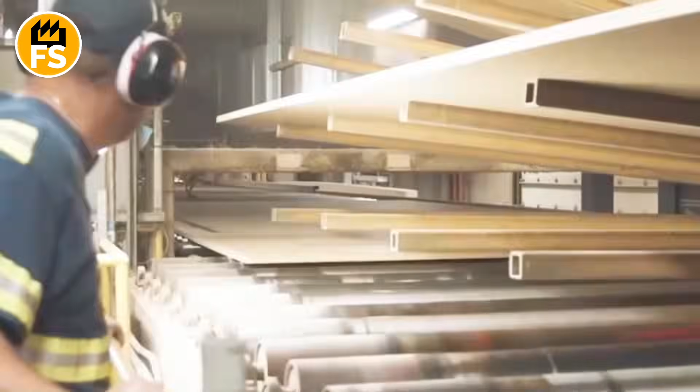The base moves along a conveyor and passes under rollers that resemble giant paint rollers. These rollers generously pour a special, incredibly strong glue onto it. Our precious veneer is carefully laid on top of this sticky surface, and this whole structure is sent to the final hot press. With a force of hundreds of pounds per square inch, the press connects beauty and strength into a single whole. At the exit, we get a huge master sheet, from which individual boards will then be cut.

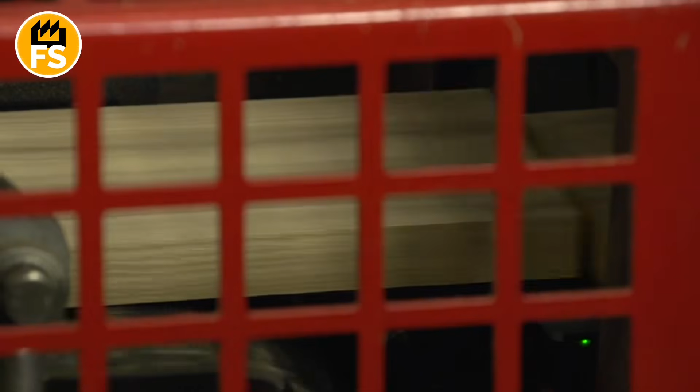But this is not a floor yet, it's just a blank. It's time for makeup and a manicure. Giant saws cut the large sheet into individual boards of standard width, for example, 5 or 7 inches. And here, each board goes to one of the most important machines, the milling machine.

An incredibly complex system of mills and knives, rotating at a frantic speed. On one side of the board, they cut a long protrusion called a tongue, and on the other, an equally long groove called a groove. It is this system that will allow the boards to fit together perfectly during installation, forming a continuous, smooth surface without gaps.

Now our board has the correct shape, but its surface is still a bit rough. It is sent for sanding. This is a whole line of several sanding machines, each of which uses finer and finer sandpaper. After this process, the surface of the board becomes as smooth as silk, ready for the final coating.

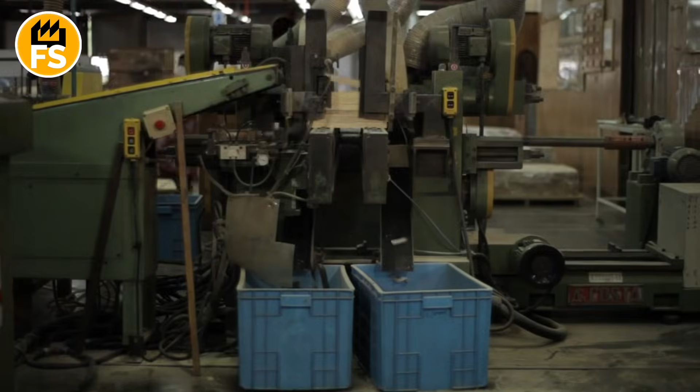And here, the real high-tech begins. The board enters a finishing line that looks like a car wash, only instead of water and soap, there is varnish and ultraviolet light. First, rollers apply the first layer of a special, incredibly durable varnish based on aluminum oxide. This is one of the hardest substances in the world, which makes the floor resistant to scratches.

Immediately after application, the board passes under powerful ultraviolet lamps, and the varnish, which in normal conditions would dry for hours, hardens in a fraction of a second under the influence of ultraviolet light. Then a second layer is applied, and again a tan under ultraviolet light. The third, fourth, fifth. Sometimes it goes up to 7 to 9 such layers. As a result, we get a perfectly smooth, incredibly strong, and durable coating.

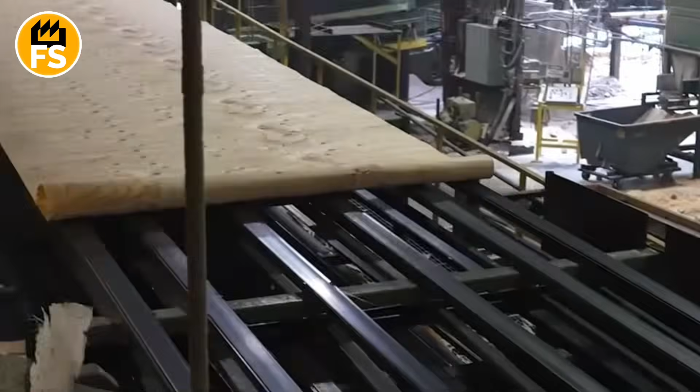That ultraviolet coating is not just a varnish. Aluminum oxide is added to its composition, one of the hardest minerals in the world, second only to diamond. From 7 to 9 layers of this coating are applied to the board, and each layer is instantly baked by ultraviolet light. As a result, we get a surface that is many times more resistant to scratches and wear than a traditional varnish applied to a solid board after installation.

At the final stage, each board undergoes strict quality control. Inspectors with an eagle's eye look for any defects, scratches, uneven color, problems with geometry. Only perfect boards get a ticket to life. Robotic manipulators carefully stack them in boxes, indicating the type of wood, color, and dimensions.

And so, having passed the path from 2 different forests, through hot baths, sharp knives, sticky waterfalls of glue, and an infernal ultraviolet tan, this brilliant creation is born. Engineered hardwood. It took the best from nature, its beauty, and the best from engineering, its stability, to become the perfect floor for our homes, which is not afraid of either winter dryness or summer humidity.

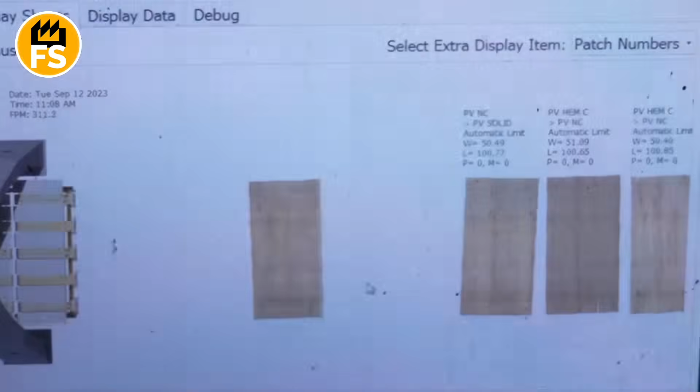The engineered hardwood market in the USA is a giant that turns over more than $10 billion a year. And this is not just a stable market, it is growing rapidly, winning an increasing share from its older brother, solid wood. Why? Because it's smarter, and the numbers prove it. The main superpower is stability. Thanks to its cross-layered, multi-layered structure, engineered hardwood is 50 and even 60% more stable than a solid board of the same species and thickness.

What does this mean in real life? It means that it can be installed where ordinary wood would go crazy from humidity fluctuations, in basements, kitchens, bathrooms, and on a concrete slab. It is not afraid of underfloor heating.

If one perfect log of precious white oak was sawn into a 3/4 inch thick solid board, a certain number of square feet of flooring would be obtained. And now, attention! If this same log were used to produce thin veneer for engineered hardwood, 3 or 5 times more finished flooring could be obtained from it. This means that to cover the same area, 3 or 5 times fewer valuable trees need to be cut down. This makes engineered hardwood a much more environmentally responsible choice.